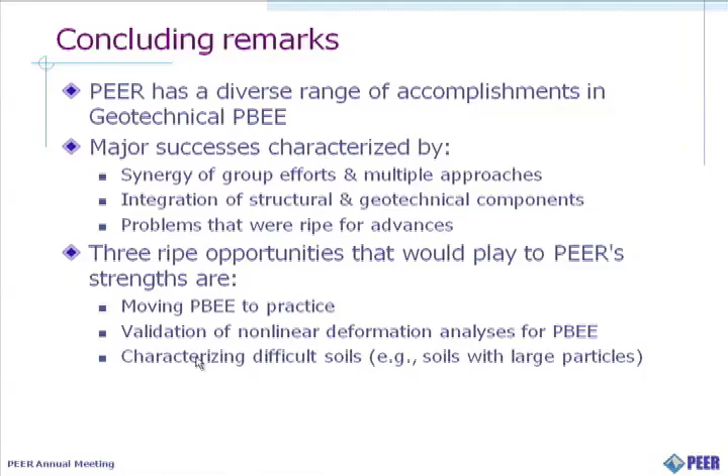So moving upward in elevation, we wanted to look at how performance-based earthquake engineering and PEER research has been applied to a number of engineered structures. We're going to do two aspects of this, one for bridge-like structures and one for building-like structures. The first of those presentations will be by Marc Eberhard, who's a professor at the University of Washington in Seattle.

Thank you, Steve, and good afternoon. The tack I took for this presentation is to first go back to the basics. I know we're kind of talking to the choir sometimes, and a lot of people haven't drunk the Kool-Aid yet, but for all of us I think it's good to go back and remember why we're doing this.

So what I really want to do is start off with the basics of what our mission is, how it applies to transportation structures, and then look at our program to see to what extent it maps to that. A good portion of this presentation is really to set up tomorrow, which is about identifying research needs and where to go next. So I want to talk about our goals and what we're doing, and I hope you're thinking, oh that's good, but the next thing is something else. That'll set us up for tomorrow.

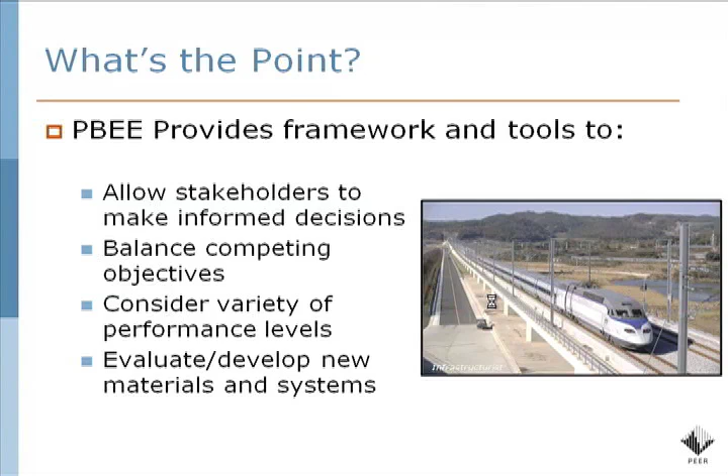And the last thing is, if you try to develop a new system or evaluate a new system, you need some kind of common framework, and the framework has to be about what's the performance - you can't just compare some of the engineering values we had before. I'm sure you can think of other reasons, but we always have to keep in mind this is why we're doing this, why stakeholders may care about the kind of tools we're developing.

Okay, so from a transportation system perspective, what are the objectives we're trying to satisfy? I spent a lot of time trying to figure out what value goes on what slide - I'm sure you can organize them different ways, but this one works for me.

The first one is economics. You can argue everything's economics, but in this case I'm talking about direct costs - that includes construction, and depending on how charitable you are to the rest of the traveling public, you could even add the costs of delays during construction, maybe noise disruption, things like that. But certainly construction costs. If you follow through the lifetime, a lot of money is spent on maintenance and inspection - that's a cost that goes through the whole lifetime of the bridge. If there are any problems, you have to repair it.

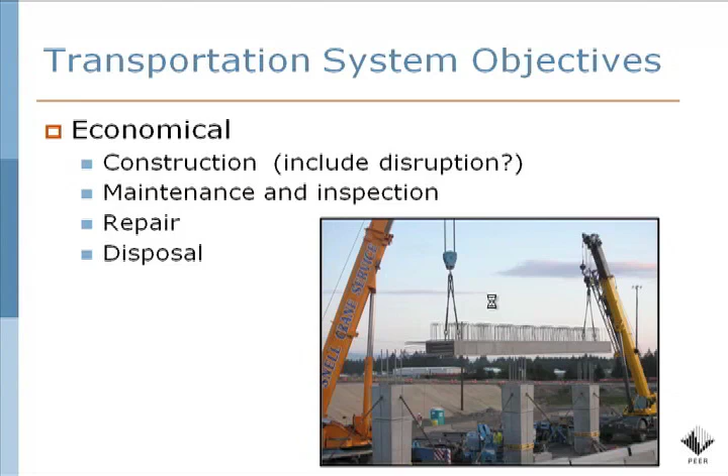In our sustainable economy now, eventually you might even think about the eventual disposal cost. So all those things are certainly one issue which is going to drive every decision for any transportation system - it's a question of economics. Now, regardless of economics, you're never going to want to have something which is unsafe. I know we can't use the word safe because safe doesn't mean anything, but fine.

We really mean low likelihood of loss of life, very low likelihood of collapse. But in my discussions with owners, they really don't want the bridge to come down. That's pretty much the bottom line. And even though we don't talk about certainties, we want to be so far off on that curve of reliability that the chance of having collapse is almost zero.

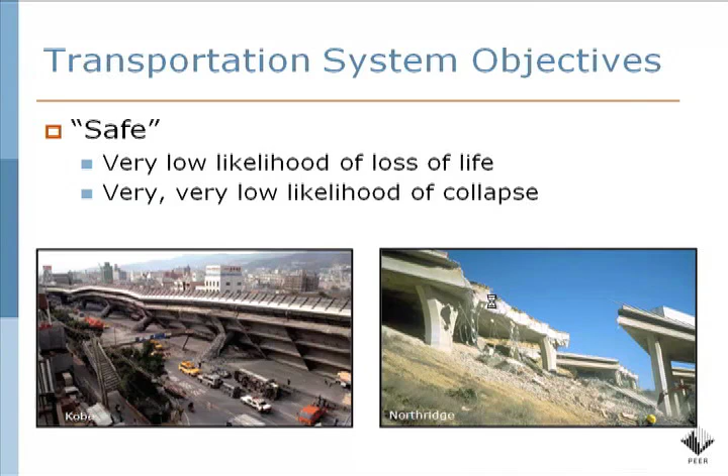Now, more recently, we're talking more about disaster resilience. And of course, a bridge by itself isn't so important in terms of whether it functions for its own needs, but what matters, as people spoke this morning, is about the community. So a bridge is not only important because of its own value, but in what roles it plays.

Do you have detours if that bridge is out? Are emergency vehicles using that bridge? How many vehicles are using that bridge? Is there a particular facility on one side of that bridge, like a hospital, that's needed more than anything else? Having a bridge that's available either immediately after an earthquake or maybe shortly after, can be an incredibly important part of community resilience.

Part of it also is that the whole issue of repair and inspection can itself be an impediment to recovery. Even if your bridge is fine, if it takes the inspectors and the bridge agency quite a bit of time to figure out whether it's okay or not, you can be down for a while. So not only does it have to be good, but it also has to be apparently good, in the sense that people can realize that right off the bat. Because the bridge is closed, even though the bridge is safe, it's still closed.

And the last one, which is really important to all kinds of owners, is loss of revenue. For some people, it might be tolls. For a port, that might be shipping that's coming in and might leave and never come back. For a train system, it might be fares - loss of ridership in the future because your railroad isn't available when they need it, and they get out of the habit of using it. All these aspects are important to the community and to the resilience of that community after a disaster.

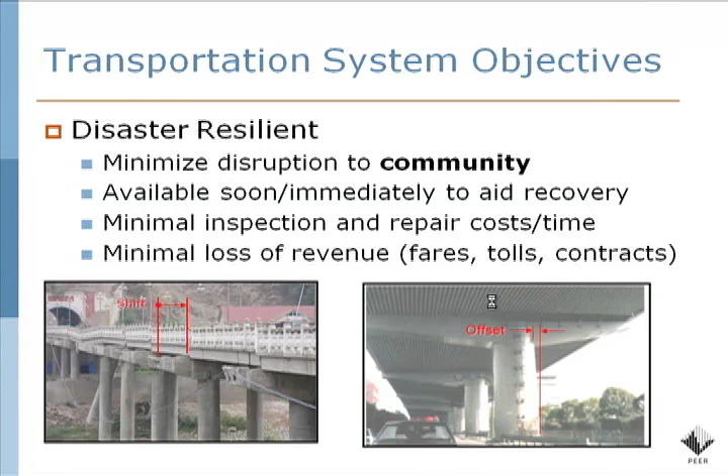And then, even more commonly now, there's the whole issue of sustainability. That's linked certainly first to durability - building bridges that don't last is going to be unsustainable by any measure you want to use. But beyond that, even for bridges which will have a pretty long lifetime, the idea of embodied carbon is getting more and more attention. You can imagine looking not only at construction, but the use of that bridge and eventually even its destruction.

But disruption to sustainability actually goes even beyond just the carbon issue. Construction causes noise, which causes disruption to communities. You have traffic congestion, which of course has its own carbon implications and huge implications on the traveling public. And finally, I'm from Seattle.

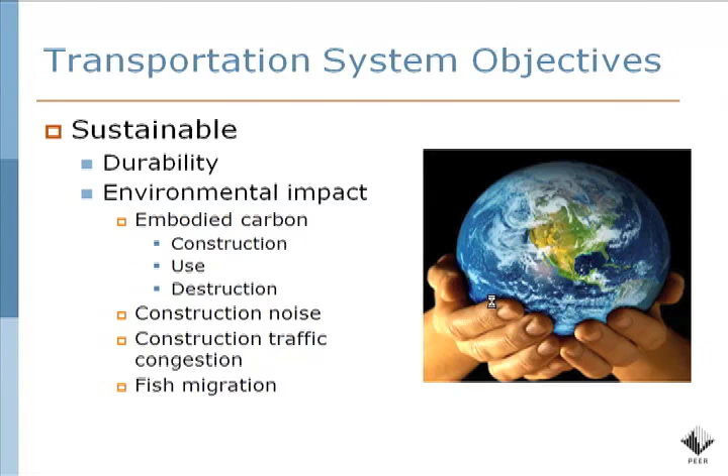You can't have a talk about environment without talking about fish migration. It may not seem like a big thing, but if you're trying to build a bridge across a river, you really don't want to build it in the winter because it's cold, so you want to do it in the summer - but that's exactly when the salmon are coming up the creek. It's a big issue for that contractor, a big issue for that owner. So you can imagine other kinds of environmental issues as well. For us, it's all about salmon. For your parts of the country, it might be trout or something else. But that actually has a big impact.

Now, how are we doing? We mean us, but also this whole performance-based earthquake engineering thing has certainly been the focus of PEER. As a group, we've been so successful it's actually being used by many other people as well. So I don't want to take credit for everything.

I'd argue there's been an incredible soft implementation that is widespread through the entire community. We talk about performance in much different ways than we would have before PBEE began. Even when there's not a calculation that's different, the concepts are embedded in the discussions, not just in the firms with the highest level of expertise and the bridge agencies most attuned to research, but any bridge office you walk into, any firm, has a sense of performance as opposed to codes, talking to owners about these things.

And certainly some major bridges, we've had very explicit implementation of performance-based earthquake engineering. And in education, which is how you affect things in the future, we have every year tons of students coming out who have these things embedded in their education, and eventually they will transform practice as well.

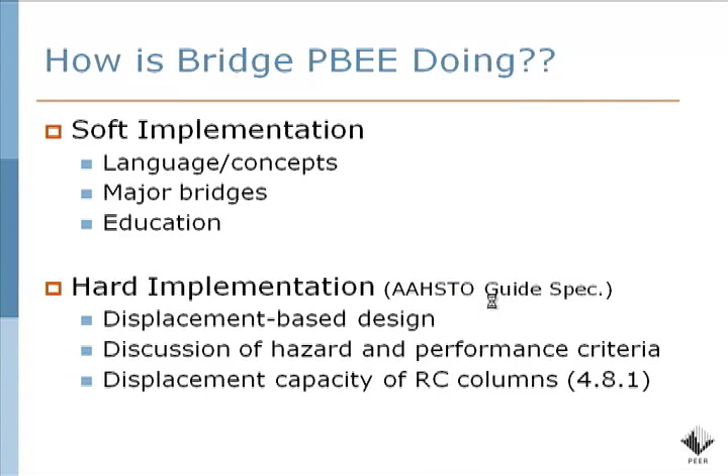Okay, so given that background, the Transportation System Research Program has sponsored a bunch of projects. What I tried to do is organize those into two categories. I'll discuss a few of them just because I had some nice slides on them, but what I really want to do is get you thinking about what we should be doing next year and the year after that.

Okay, so there's some work on ground motion selection. I heard the first category here is really about enabling technologies, overcoming implementation barriers and complexities. Ross said it so much better - moving performance-based earthquake engineering to practice. If I had seen his presentation, I would use that bullet instead of my long one. It's used in test beds, it's used in research all the time. What do we need to do to get it to the place where it's actually tractable, accessible, and the other things Ross talked about?

So ground motion selection procedure, you heard about that earlier - that's about making things simpler. Stochastic modeling brings uncertainties into the modeling of ground motions. What happens to long duration motions? We haven't considered that so far. And even if you're using the same technology, can we develop tools which allow you to implement that technology without having to do all the work yourself? Even in my research, I need these tools because I don't want to become an expert in all those different areas.

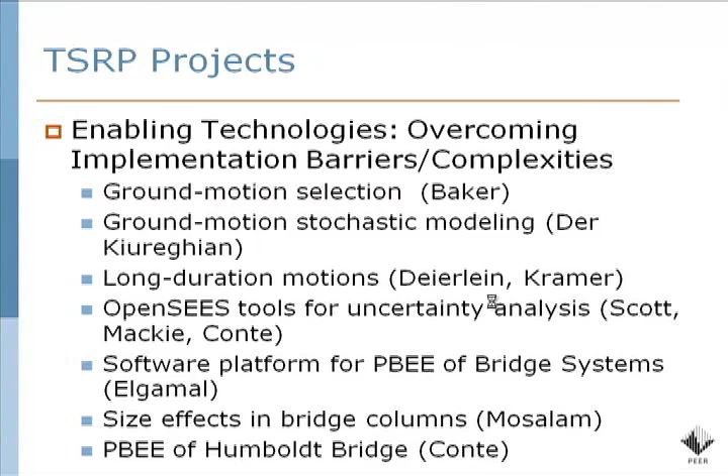So there's several projects: one is OpenSees tools for uncertainty analysis, a software platform for performance-based earthquake engineering that Elgamal and others are working on, the effect of size effects, and finally a test bed - I just happened to mention the Humboldt Bridge. Again, the test bed gives you the ability to go through the whole procedure, see what takes a lot of time, see what's difficult, what needs to be filled in, and what we need to do to make this accessible to everyone.

And then the second part of the research program has really been about developing new systems and getting better performance out of those systems. There's a bunch of them you heard already about, high performance fiber reinforced concrete - I won't talk about that again since it was covered this morning. Then a series of different systems: post-tension cast-in-place columns, dual shell columns, precast columns, rocking foundations - part of it done by the geotech side, part on the structure side - and finally one on bridge isolation.

And these are all tools, or at least most of those are tools, different ways of building a bridge. If you want to talk about which one is better or best for a particular situation, you can't do that without performance-based earthquake engineering. You have to be able to look at the entire life cycle of a bridge and see whether it's better using one approach or another, or maybe we're better off doing what we've always done.

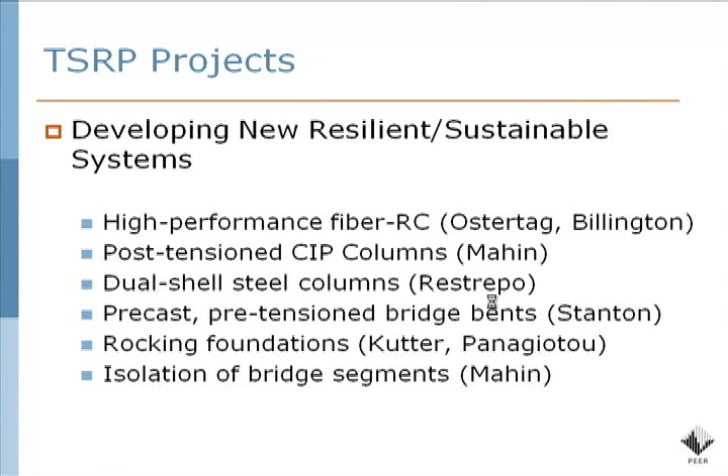The projects are summarized on this website. If you just go to the PEER website and click on transportation projects, you can see summaries of most of these projects which are up here. So for the next few minutes, you can just look at what I'm doing as an overview. There's a lot more detail on that website, and I encourage you to look at it.

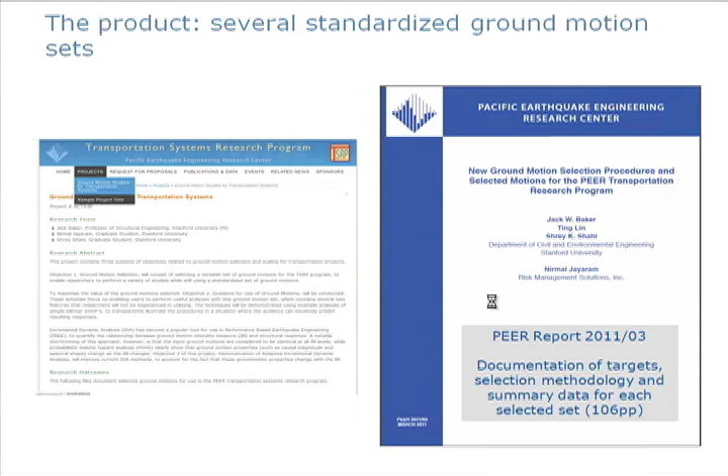In terms of enabling technologies, we talked about Jack Baker's work, which is just getting ground motions to a form where people like me can actually use them. We also talked about using a stochastic approach for analysis of spatially varying ground motions. So far, the methodology hasn't included that spatial variation.

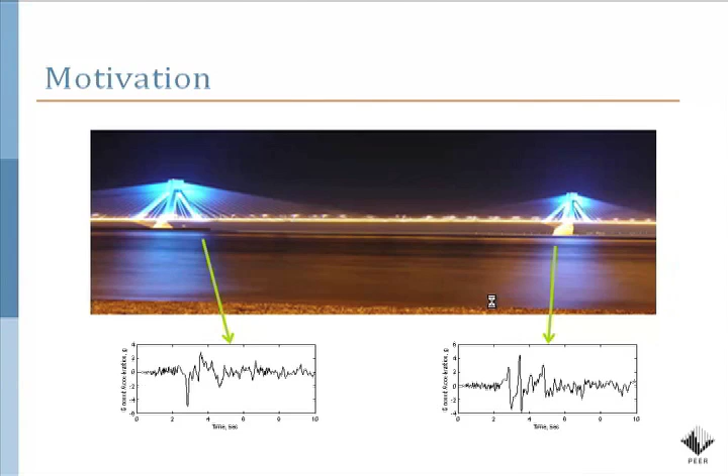I love this slide because it's the most beautiful picture of a bridge I've ever seen. It shows that, as we all know, due to wave passage effect, reflections, and different soil conditions, you get different ground motion in different locations. How do you take that into account? The project looks at different methods. I'm giving one particular result: we're looking at the difference between the nonlinear displacements at each bent compared to the linear ones, comparing that for a coherent ground motion versus an incoherent ground motion. As you might expect, it makes a difference, and also depends on what part of the bridge you're looking at. If you're at the end of the bridge or the middle, the effect of coherency will have different effects.

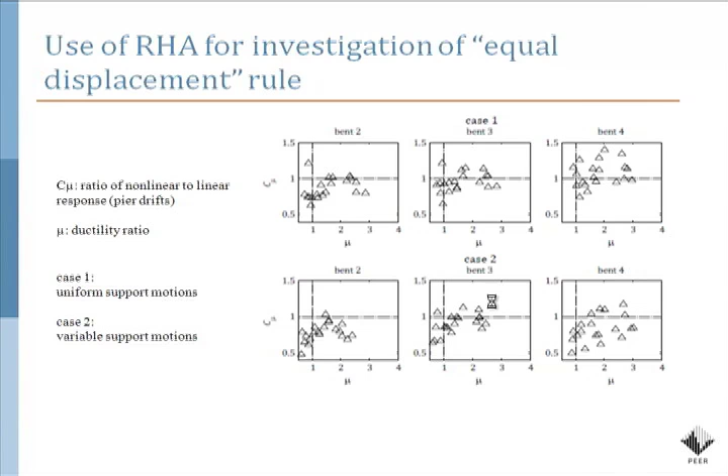The one you heard about already was also the idea of the bridge performance-based earthquake engineering program. It allows you to look at an ensemble of ground motions. It allows you to generate these finite element models automatically. Isn't that great? It then allows you to post-process all these things so that you actually get results quickly rather than having to write all your own scripts to look at what the results are.

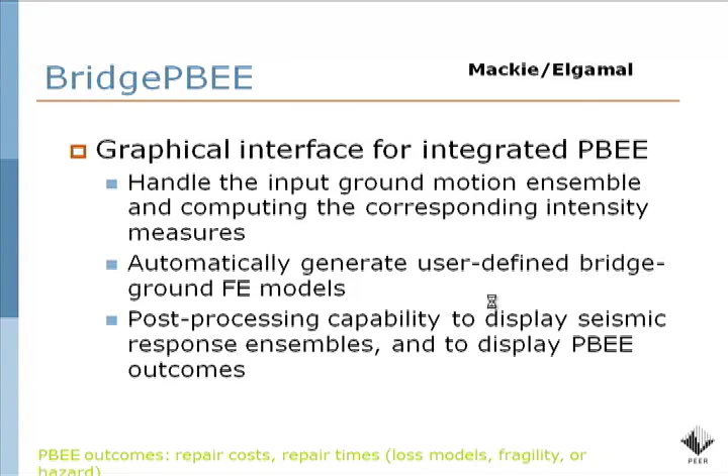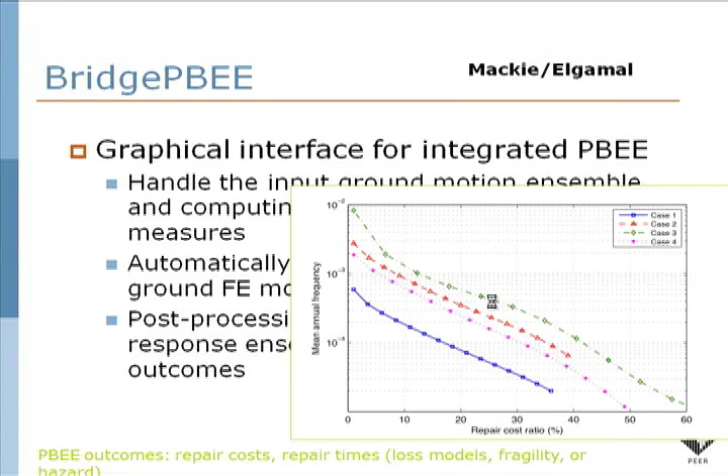The good news is that there's actually a graphical interface which allows you to put in the data to get you to that result we just had. Doing it on your own is not so fun. Doing it with the interface helps quite a bit.

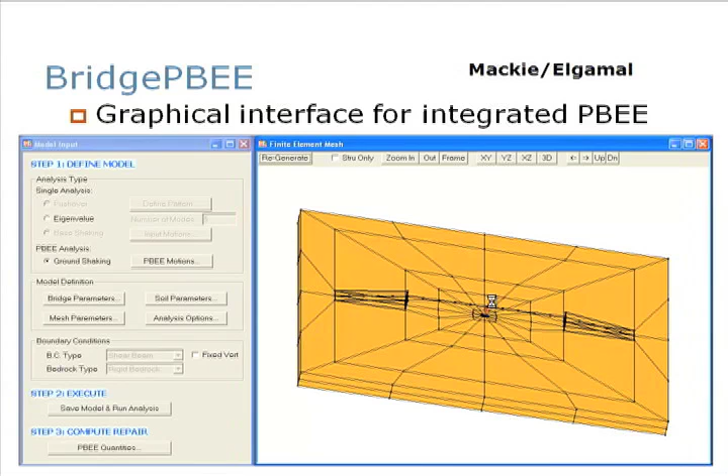Another work here is on the Humboldt Bay Bridge test bed. We saw a slide similar to this before. That test bed is one example of applying it to a very complex system—one that has long spans, joints, and a complicated soil profile. That's pretty much the whole enchilada.

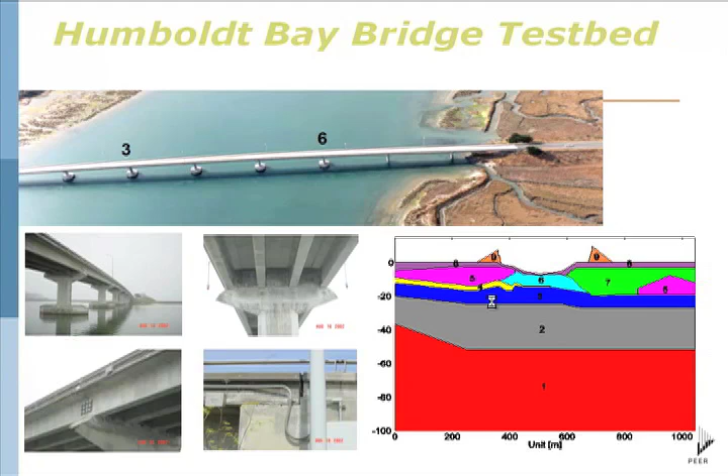What we really want to do is apply it to one of the more complex systems and see what you run into. Certainly one of the things you run into is model complexity. The text here is a little small, but basically there's 10,889 nodes—a huge problem. It has, of course, issues for computational demands, which Frank will address for us. But also the complexity of the data coming out, and how you visualize it.

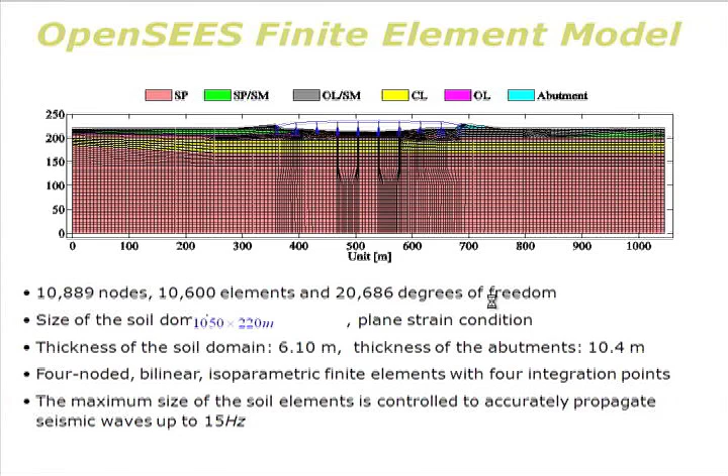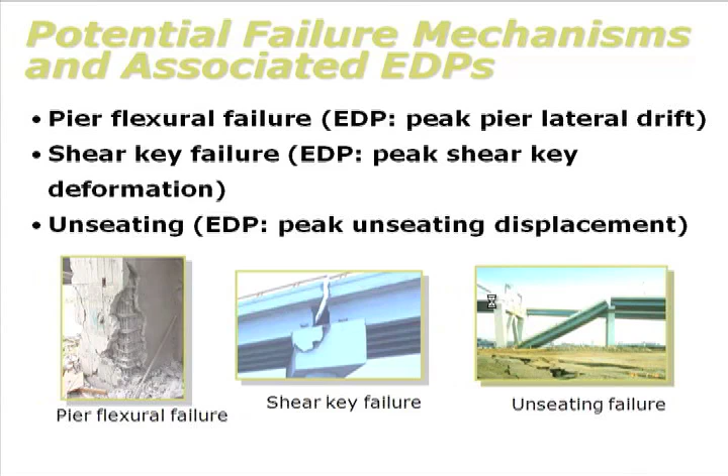What's nice about this project is that it has structures, it has geotech, and it runs, even for this complicated case, from the seismic demands, or the ground motion on one end, all the way to costs on the other, for a pretty complex situation. So, for example, it's looking at various kinds of failures: the pier can fail, the shear key can fail, and most drastically, a span can come unseated. All of those are built into it.

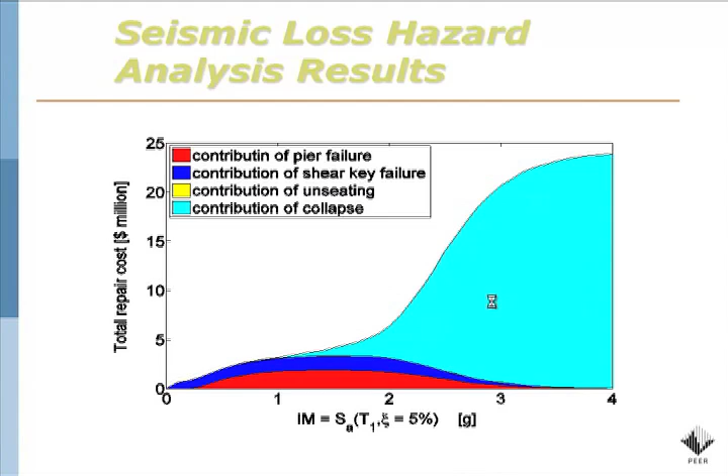Finally, you get the same slide that Ross had a few minutes ago, showing the effects of these various kinds of failures and the costs they have as a function of the intensity of the ground motion. You compare that with the ground motion intensity distribution, and you can also figure this out as a function of time. For low amounts, it's all about the piers and the shear key, but at the end, when you have total collapse, that's when your costs become huge.

Okay, the other aspect was developing new systems.

There are a lot of ways to design new systems that work better. This is an overview slide I borrowed from Steve, which on the left-hand side talks about hysteresis curves that go back through the origin, with the hope that for a particular system, at the end of an earthquake, the structure will go back to where it started.

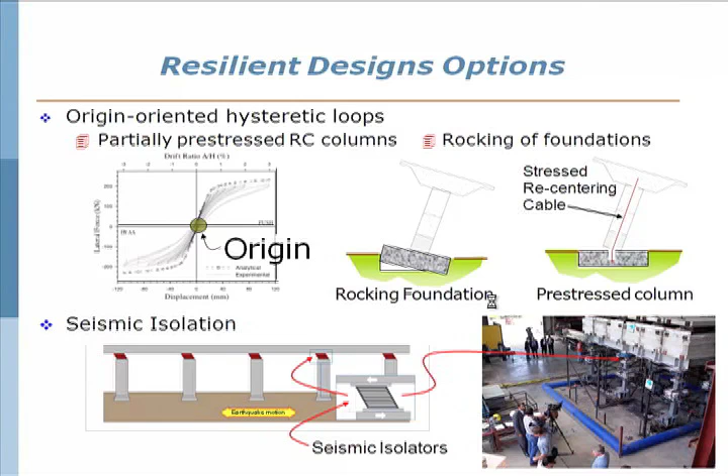There are a lot of ways to achieve this. If you look at the 3 or 4 systems I'll cover, they all share that same characteristic. In some cases, it could be a rocking foundation; in others, some kind of pre-tension element or rubber band effect that snaps it back in place. But in both cases, you get this center-origin hysteresis curve. Or if you don't like dealing with all that deformation, you can also isolate the bridge, which is the last one I'll discuss. I'll go through these relatively quickly due to time.

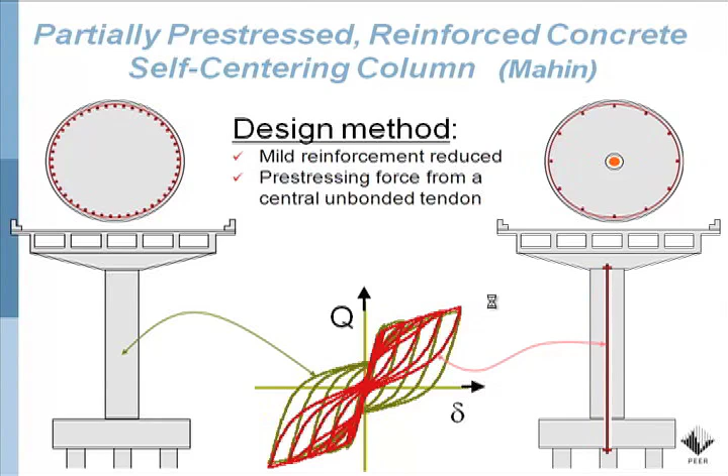If you look at the tests that were done, that's exactly what happened. Even going up to ductility ratios of 10, which is pretty high, the displacement of the unbonded post-tensioned system was within 10% of the normal system—not a big difference. But the main thing is, even at those very large displacements, the residual displacements at the end of the earthquake were less than 0.6%, about 6% of the total displacement in the bridge. So that showed the success of that technology.

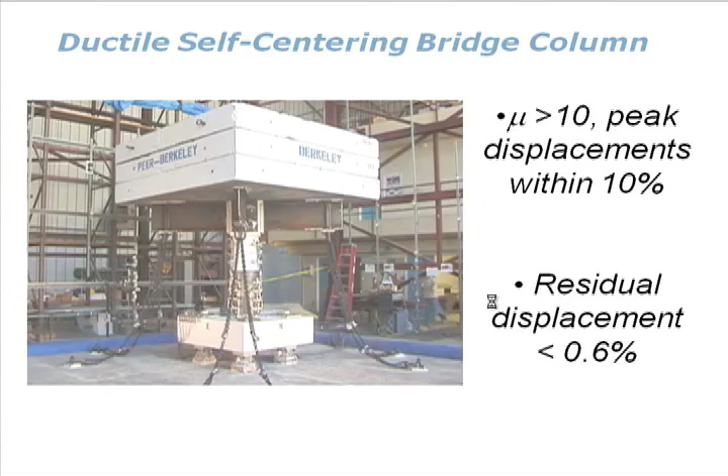Now other people have developed systems that also use post-tensioning. In this case, it's work done at San Diego by Jose Restrepo and his colleagues. This system also has the advantage of accelerated bridge construction—if we're worried about disruption to traffic when building things, you want to put them up quickly. It also has the advantage of resilience, self-centering behavior, coming back into place, and is even a bit lighter than some other systems.

To describe it quickly: it's basically two sets of steel shells, an outer one and an inner one, with grout in between. Down the middle, there are PT bars that provide a recentering force. Then, to dissipate energy at both the top and bottom, there are energy dissipators that can take different forms depending on which variation you're looking at. The idea is that you've now separated the column stiffness from the energy dissipation.

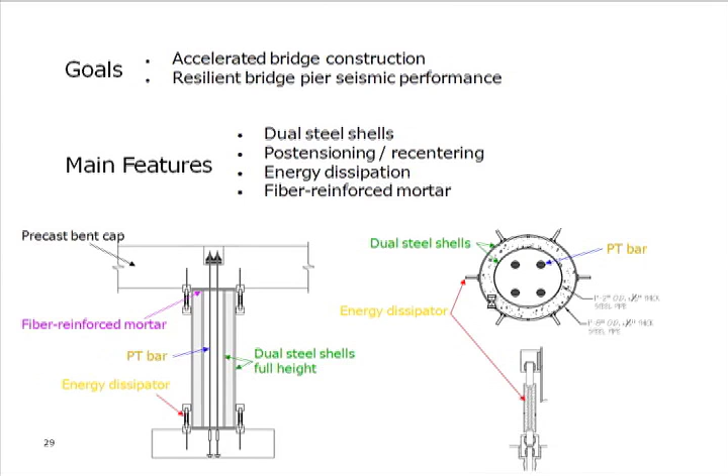At the end of an earthquake, you can inspect those components, and if needed, you might even replace some of them to get back to business. It has less structural damage than monolithic systems, small residual displacement, and is very resilient—operable after a strong earthquake. Again, that energy dissipation is a separate component which you can take out and put back in.

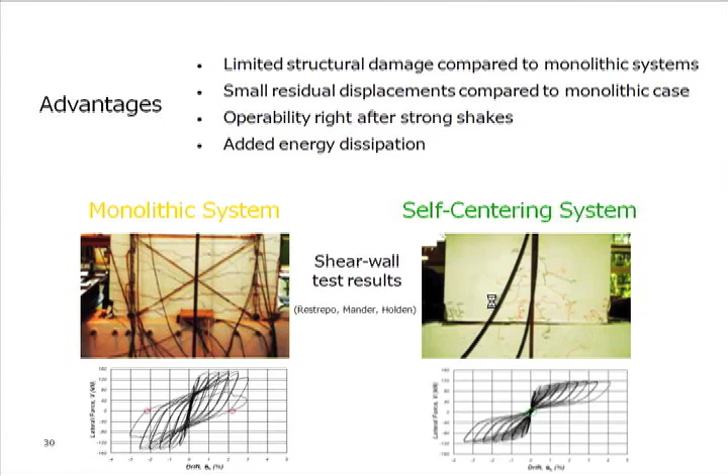As the hysteresis curves show at the bottom, the one on the left is classic reinforced concrete behavior—those little red circles show that for zero force, you cross at large displacements. On the right-hand side, the green circle shows that you're always going back to the origin. It's actually from walls, but it's really the same concept.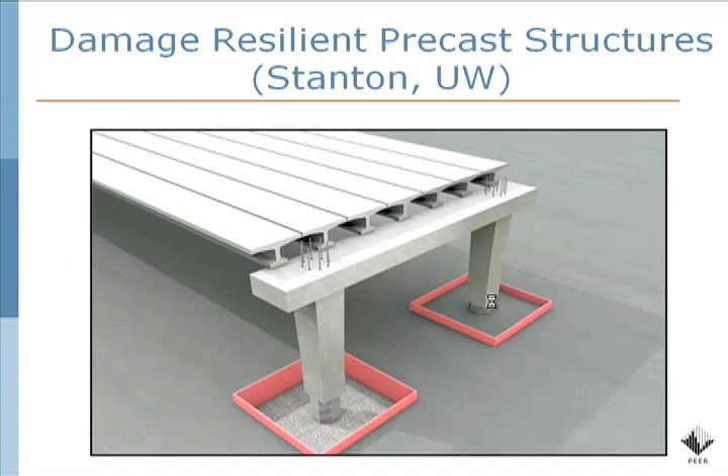The system we're doing at the University of Washington has a lot of similarities—we're essentially doing a pre-tensioned version of that. The column is made in a precast plant with pre-tensioning, not post-tensioning. It's brought out to the field, and you put the column in the middle of the footing with the steel there. You cast the concrete after the column is placed, bring in a precast column on top, and then put it through those holes to engage the column bars before continuing with the rest of the bridge.

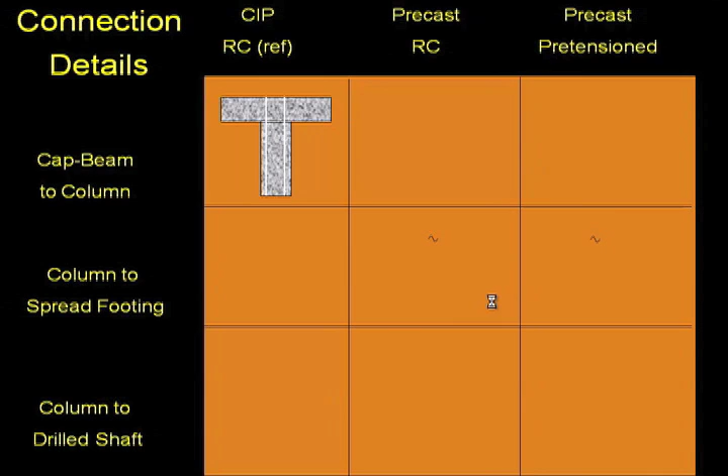We've done a bunch of different tests, capping the column connections. We've done both classic reinforced concrete versions, a precast version, and a pre-tensioned version. We'll also make those same connections for precast column connections to footings.

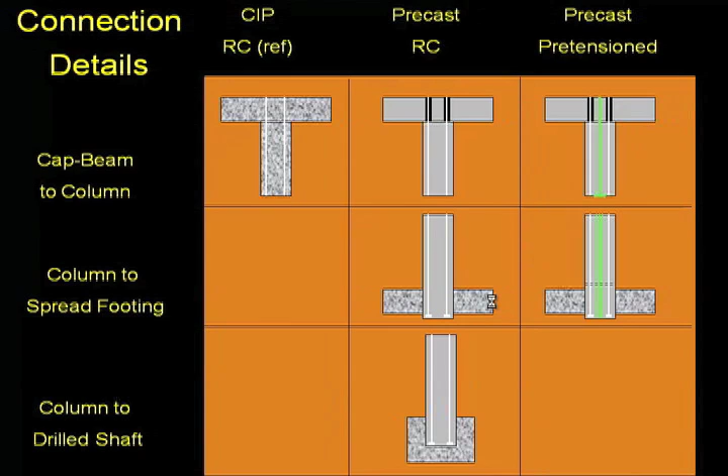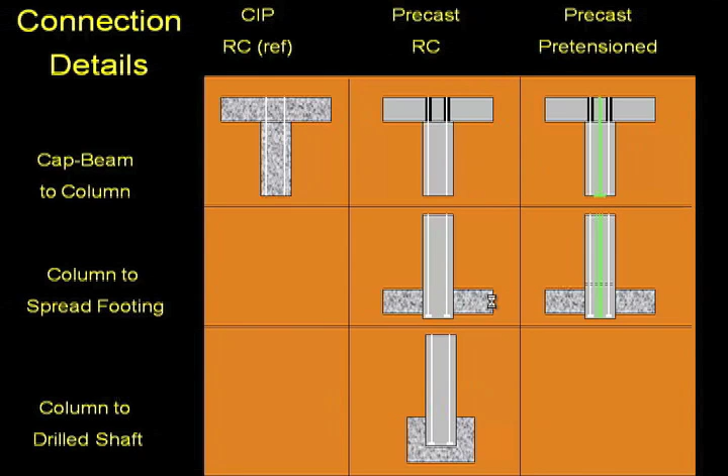We also did some tests between precast columns and drilled shafts, which is a real common way of doing it. The next step is to incorporate these new materials you heard about earlier today from Claudia, to see if we can have the precast and pretensioning advantages plus increased displacement capacity from improved materials.

The next step is yet another way to get recentering, which is to have rocking behavior. In this case, as heard before, it goes up and comes back. It's quite interesting, and this project is very much related to the one that Ross spoke about. That's great, but what happens in the rest of the bridge?

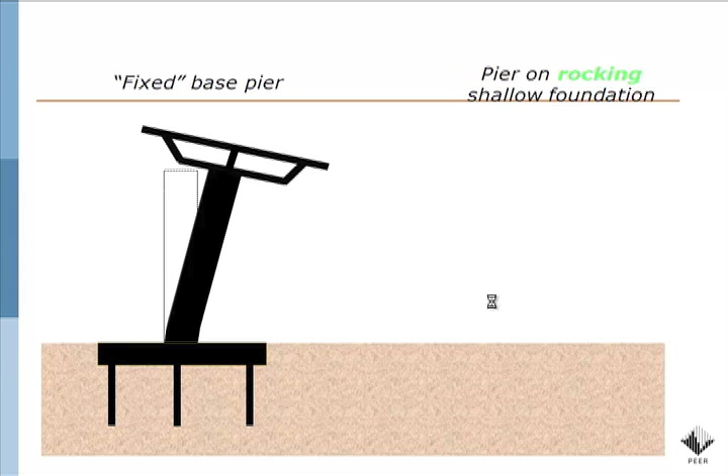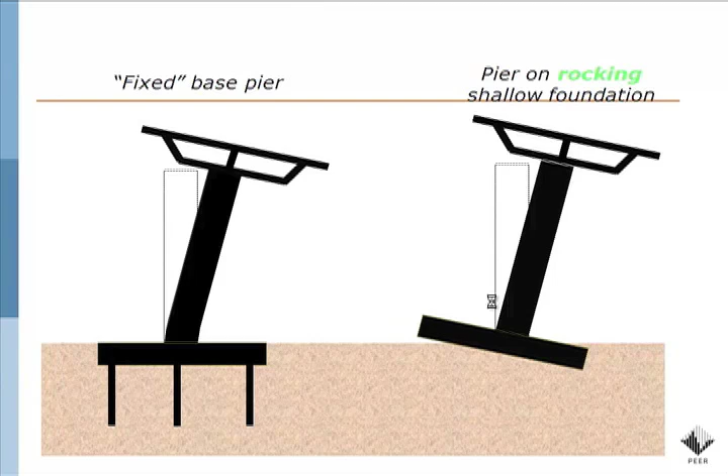So one case is a fixed-base pier, where the deformations are taken more or less at the base of that column, versus either a shallow foundation or a deep foundation that's rocking, where we just allow that foundation to go up and down. And again, what's nice about performance-based earthquake engineering is that if you follow through all the steps, which they did, by the time you're done, you can get this kind of result.

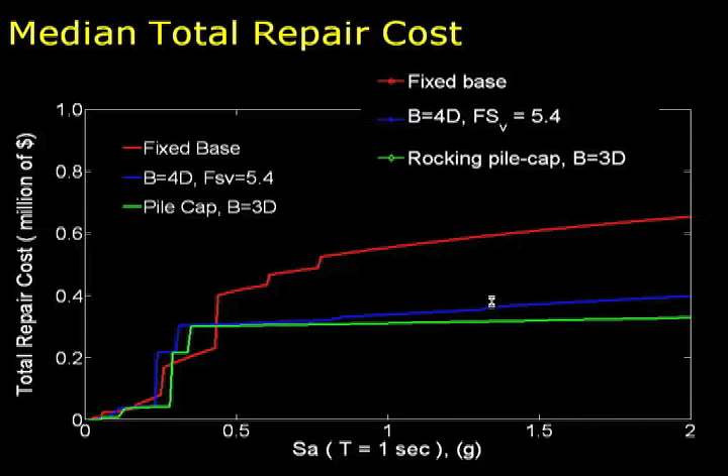The final example I want to use is isolation of segmental bridges. You can isolate a bridge by itself. If it's continuous, that's great. If you have a bunch of segments, there's nothing telling you those segments all have to move together. In fact, they're not likely to.

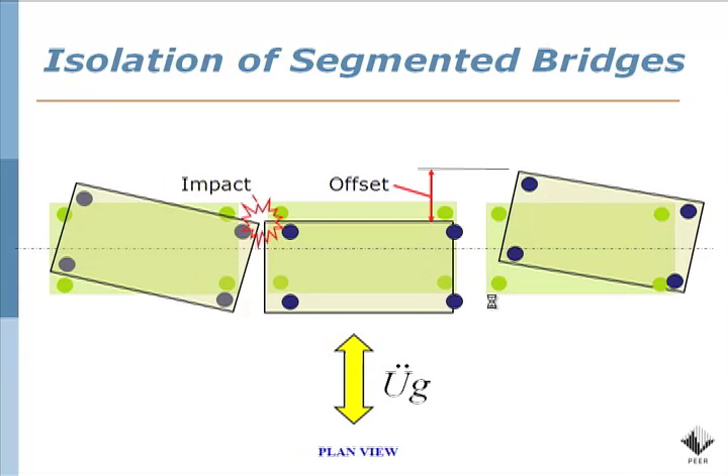So on one hand, they bang together, shown on the left-hand side. On the other hand, at the end of the earthquake in particular, you can have this big offset, which is not going to make your owner very happy, particularly if it's a rail line where you want that alignment at the end. So in this project, we're looking at the effect of having some guides which restrain the relative motion between the segments. It's kind of a stopper in one direction, and in the other direction, it keeps them close together.

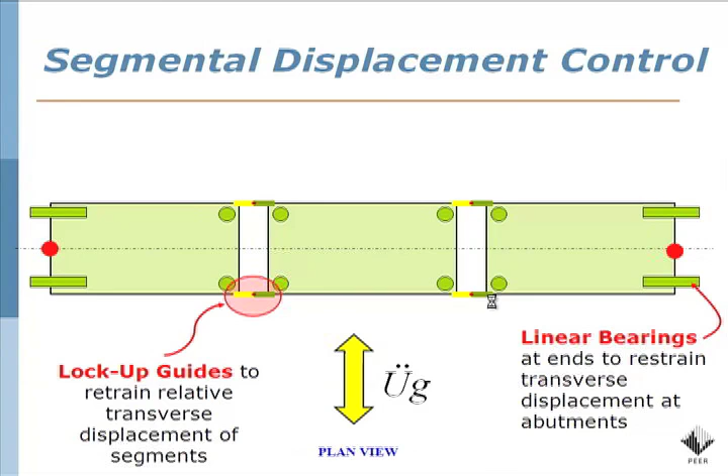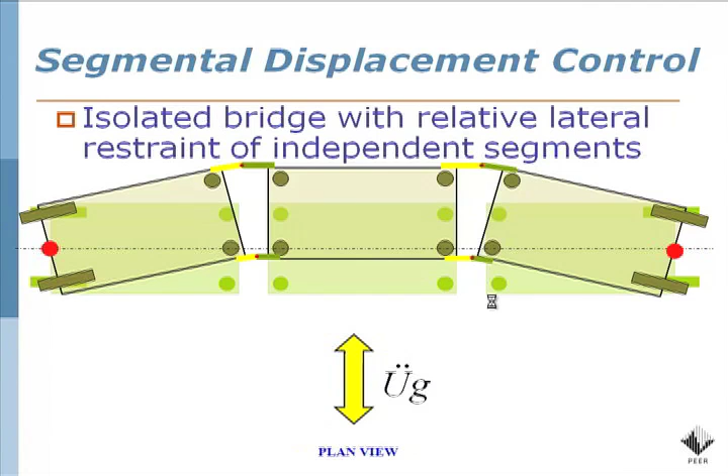The idea is that as the bridge goes back and forth, you allow some relative motion, but only a certain amount, restrained by these lockup guides. Here's a quick example of what a lockup guide might look like. You can see at the top how it deforms when it moves sideways, and it also has longitudinal constraints for a certain amount of motion.

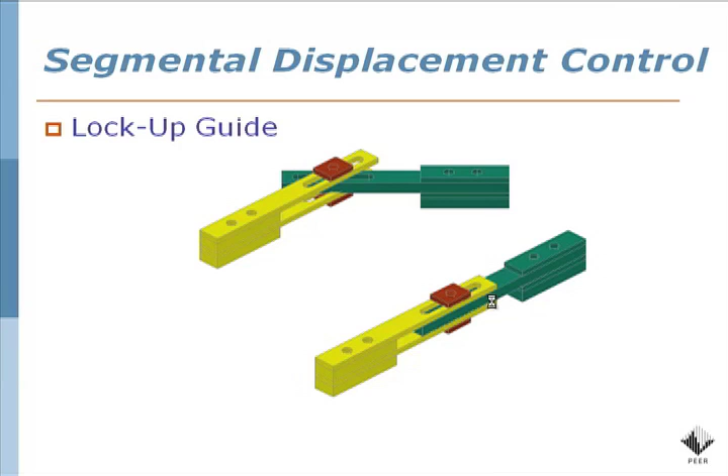Unfortunately, Steve already showed a picture like that, with people in his. It was tested not only for the bridge by itself, but the bridge with the rail on top. Certainly if you're in the rail business, you want to know to what extent that rail is going to help keep things together.

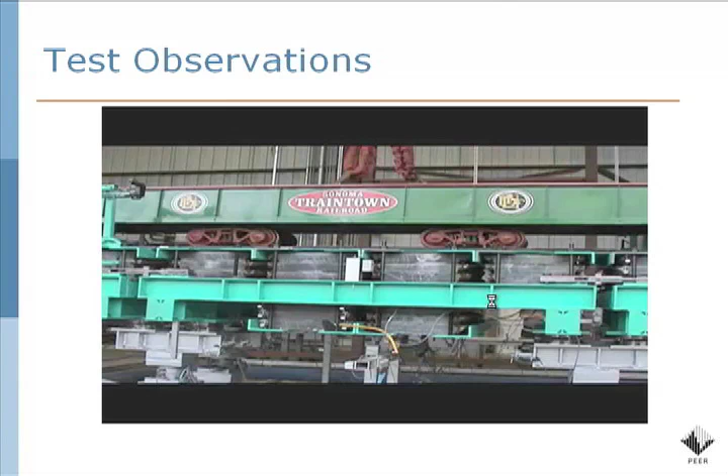So the idea here was to give the basis for performance-based earthquake engineering. Why are we here? What are the advantages? I've argued that it's already transformed bridge engineering culture, and it's in the process of transforming standard practice through education, code provisions, and major bridges. We're going in that direction. We have to figure out how to implement it, and what level of complexity is appropriate for different circumstances. But I think it's coming, and it is bringing about change.

The Transportation System Research Program has basically focused so far, or lately, on enabling technologies, or as Ross would say, moving performance-based earthquake engineering to practice, and also on developing and evaluating new systems. Please think about coming tomorrow and participating in all the various sessions. We not only want to talk to you, but we very much want to listen to you as well, because the information from tomorrow's sessions, both morning and afternoon, will be used to guide the next phase of PEER. Thank you very much.